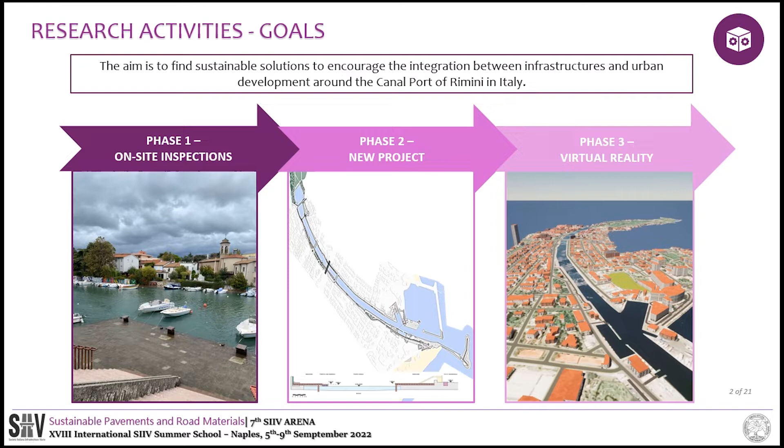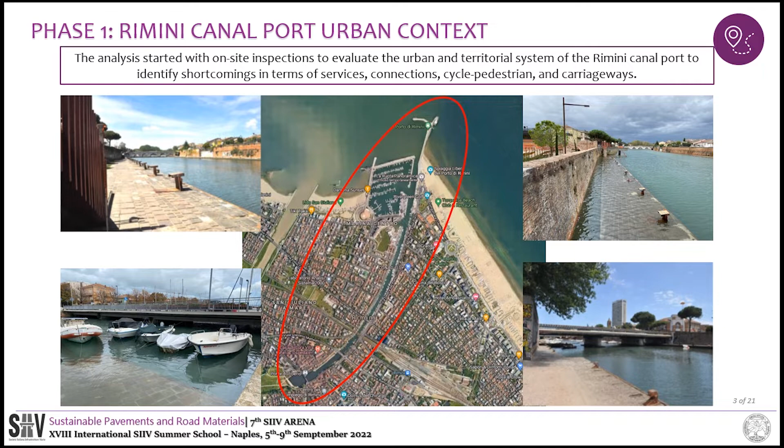In the first phase of the study, several on-site inspections were conducted to find out about the current state of the area. As can be seen in this slide, the major problem is near the docks for the transit of cyclists and pedestrians, because during floods, water covered the docks, making it impossible for passengers to transit.

Then it was analyzed the institutional and environmental framework, the urban, territorial and landscape system, the relationship between the canal port and the city center, the existing function and services, for example, the ICT services, and the social, economic and cultural context of the Rimini Canal Port.

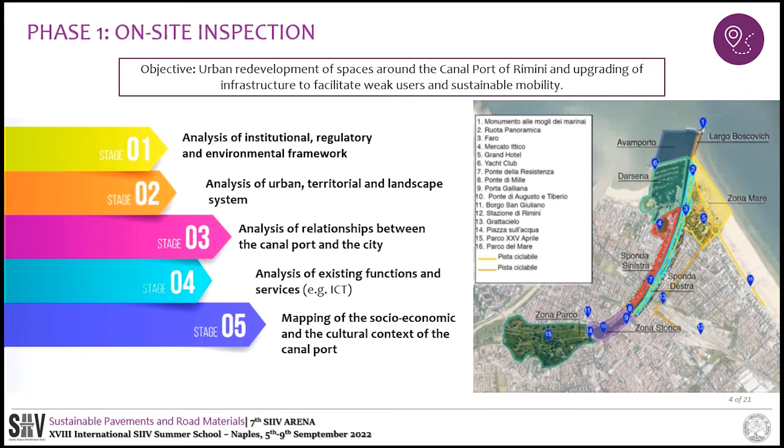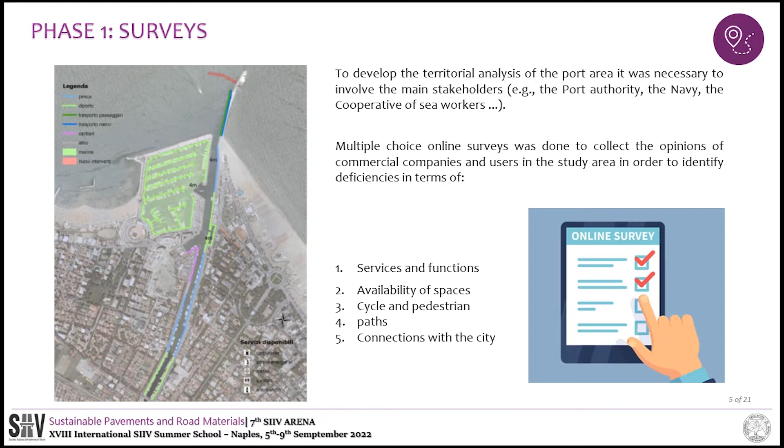In order to involve the main stakeholders and citizens who orbit the canal port, an online survey with multiple choice was conducted to find out their opinion in terms of services and functions, availability of spaces, cycle and pedestrian paths, and connection with the city center.

In this slide, you can see the difference between phase 1 and phase 2. Phase 1 involved the collection of data and useful information to be able to develop a project proposal that took into account not only the technical aspect, but also the needs of those who use the services in this area. All this information was useful for the second phase.

At this stage, from the data collected, it was possible to develop a SWOT analysis to identify the main criticalities and potential of the area. The combination of these aspects made it possible to establish design indicators through which it was possible to develop various project proposals. But the SWOT analysis does not define the priority of the intervention, so for these reasons, we use the BOCR analysis that identifies the priority of interventions.

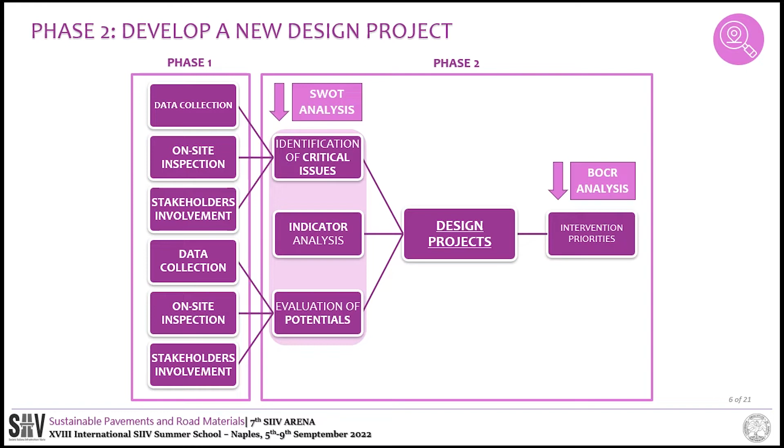In the first step of the second phase, following the SWOT analysis scheme, the main strengths, weaknesses, opportunities, and threats were identified. The identification of criticalities was possible thanks to phase 1.

The analysis was divided into three parts. Initially, thanks to the collaboration of the Municipality of Rimini and the public transport company Start Romagna, it was possible to consult open data and urban planning tools. The second phase involved on-site inspection to identify the problems, and finally, in the third and last phase, the stakeholders were involved through a questionnaire.

So in this slide, you can see the 8 main criticalities. First of all, the promiscuity between areas dedicated to fishermen's activities and areas for citizens and tourists. The presence of a ferry service to connect the two docks of the canal port that has a very low capacity. The interruption of the seafront path currently under construction for the Parco del Mare, and also the lack of public parking spaces around the Rimini Canal Port.

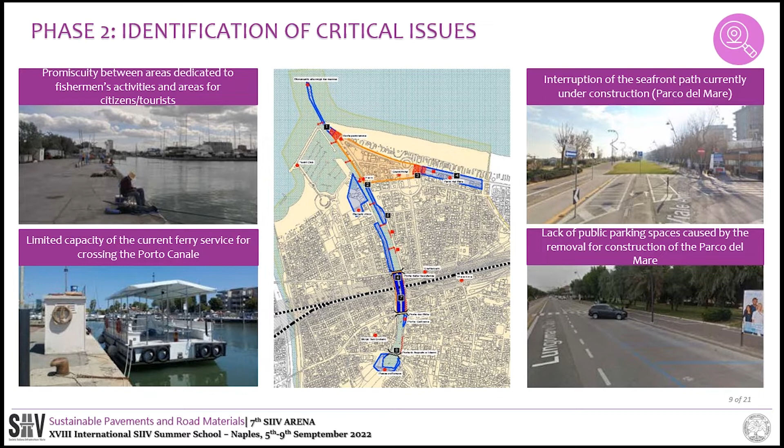Then other critical issues are the discontinuity of cycle paths at the service areas along Via Destra del Porto, the poor safety of docks and the irregularity of the moorings, the presence of several architectural barriers that hinder access to the docks and complete inaccessibility during floods, and then the bottleneck present in the last part of the Rimini Canal Port near Ponte di Tiberio that does not allow the construction of a cycle path.

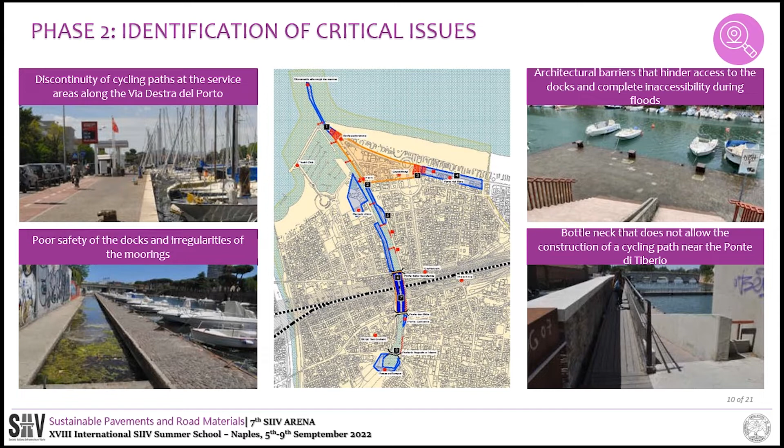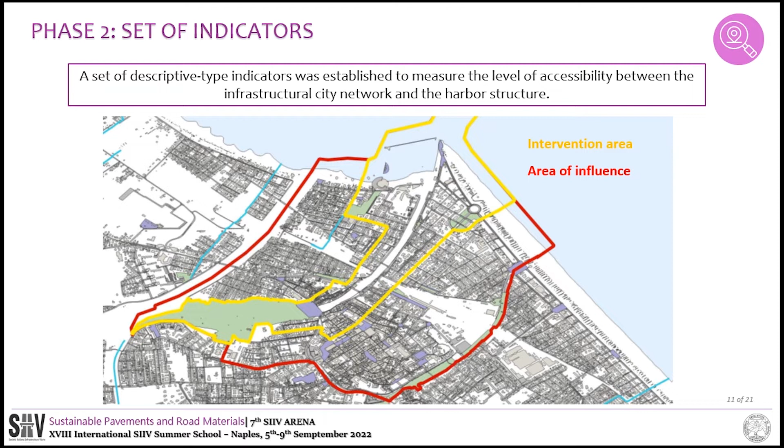After the identification of critical issues, a set of descriptive indicators was established to measure the level of accessibility between the infrastructural city network and the harbour structure. The study area was divided into two parts: the yellow area represents the intervention area in which the project proposal will be made, while the red area represents the area that influenced the intervention area in terms of accessibility.

These indicators are necessary in order to support the design choices for the redevelopment of the area and as a support for the monitoring phase of the proposed interventions.

The choice of the indicator to be used for the analysis involved, first, a phase of literature research. Then, in the second step, the selected indicators were analyzed through the GIS platform. Finally, in the third step, for each indicator tabs were created divided into 5 categories: environmental, economic, infrastructural, urban, and social aspects. Thanks to this first part of the second phase, it was possible to find design solutions for each of the identified criticalities.

First of all, the improvement of the quality of public urban spaces around the Rimini Canal Port, functional public spaces for loading docks that are at the same time attractive for tourists, the implementation of the ferry service in collaboration with Start Romagna, and the creation of a parking building located in a strategic position to facilitate intermodality.

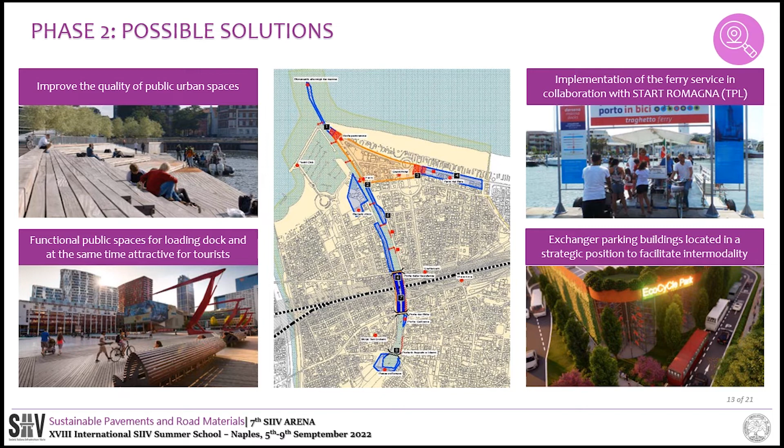Other solutions are the patch of cycle-pedestrian routes and the interconnection of social and cultural attraction poles, the raising of the docks and the legalization of moorings, the requalification of the docks with the consequent improvement of the quality and safety of public spaces, and then the cycle path connection near the Tiberius Bridge.

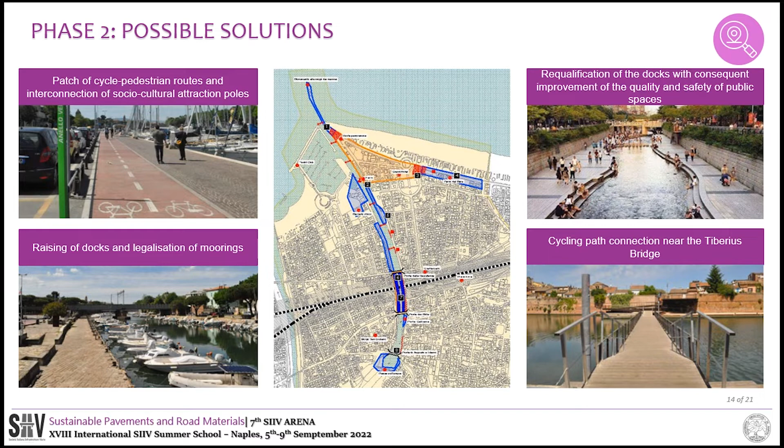The SWOT analysis allows the identification of possible design solutions, but does not allow us to know the priority of these interventions. For this reason, the BOCR analysis was used. The BOCR is a tool used to obtain a priority scale of the interventions to be carried out.

Starting from the identified indicators, these were classified into nodes depending on whether they were benefits or costs for the study areas. Then the opportunities and risks were assessed through the SWOT analysis done previously.

Using the Super Decisions software, the benefits, opportunities, costs, and risks, and the 8 project solutions identified were included in the software, considering project 0 as the current situation without any improvement measures.

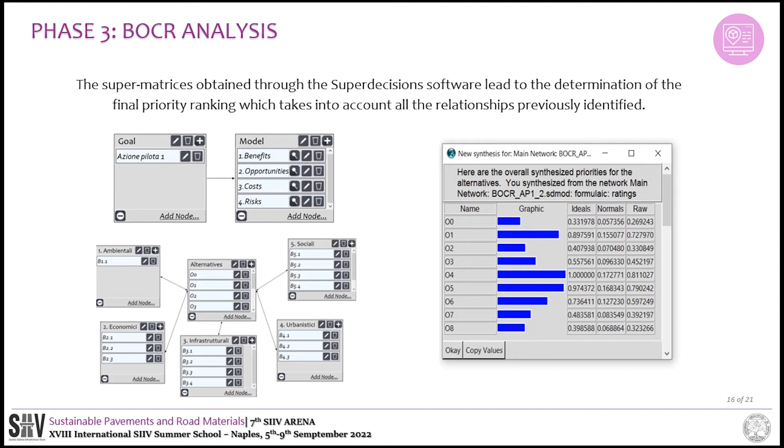In the slide you can see the priority scale of the interventions obtained from the analysis. The most necessary interventions for the redevelopment of the areas are the improvement of cycle-pedestrian paths and the redevelopment and raising of docks. This does not mean that the other solutions are not important, but this identifies only the priority of interventions.

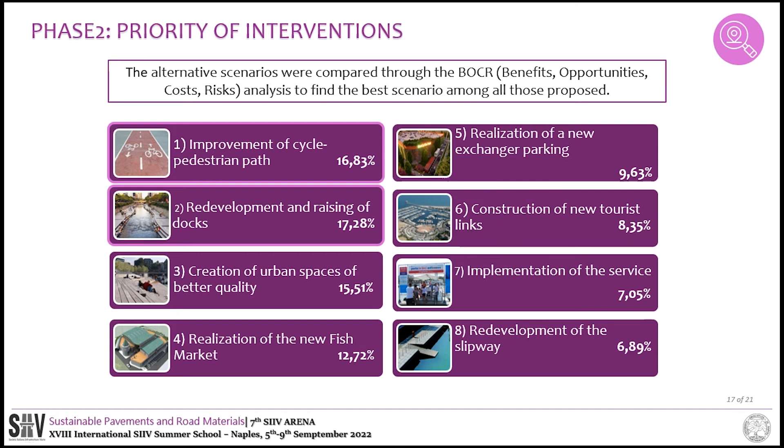In the last phase of the study, the current scenario and the future one will be compared through virtual reality. This last phase is divided into 3 phases. First of all, we recreated the Rimini Canal Port through the use of AutoCAD and InfraWorks.

In Twinmotion software, we represent the virtual reality of the Rimini Canal Port, and then with the use of VR glasses, we can see the virtual reality of the 2 scenarios.

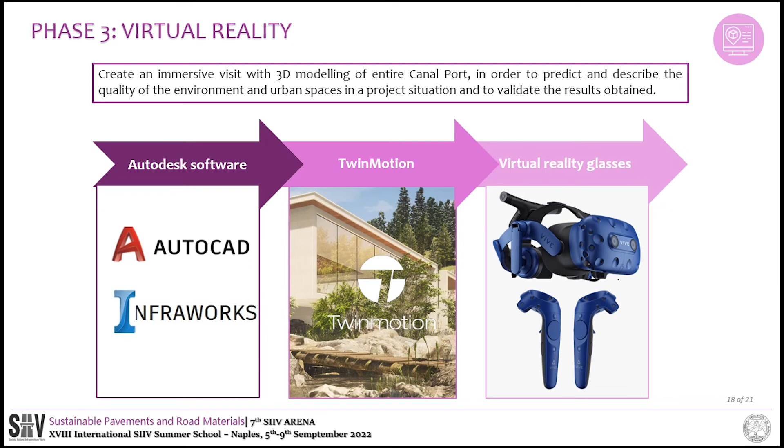So through virtual reality, it will be possible to compare the 2 scenarios: on one side, the current state of the Rimini Canal Port, and on the other side, the future state of the cycle and pedestrian infrastructure following the improvement of the cycle path and the raising of docks.

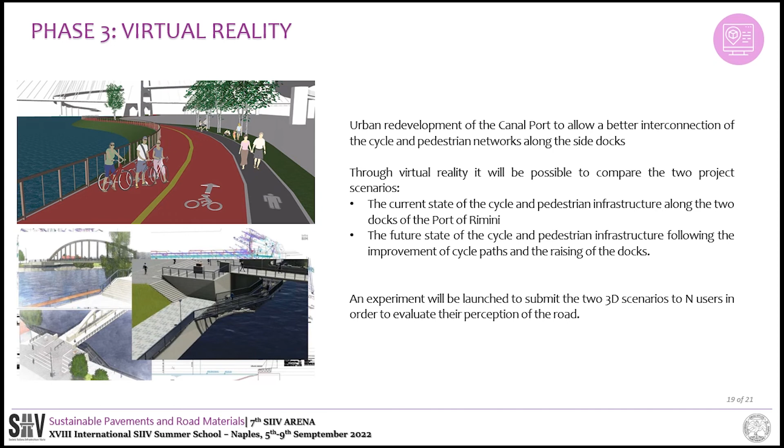In the future, a survey will be done with the 2 3D scenarios in order to evaluate the user perception of the road.

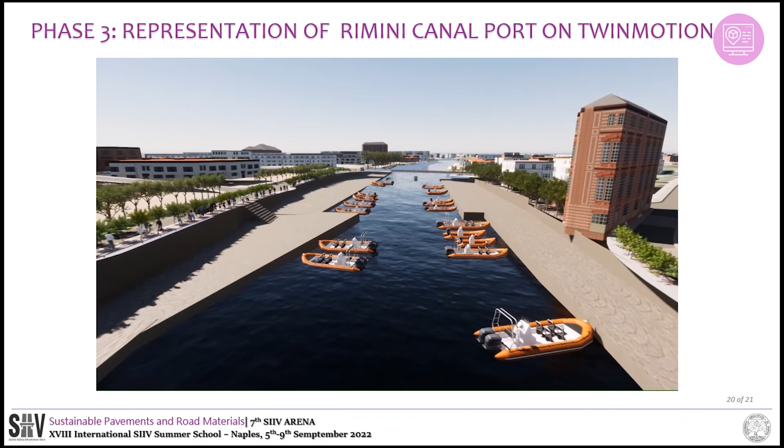In this video, you can see the creation of the current state of the Rimini Canal Port through the use of Twinmotion software. There are still some details to be completed, but the goal in this case is to recreate an environment in which users can recognize the differences between the before and after intervention infrastructures.